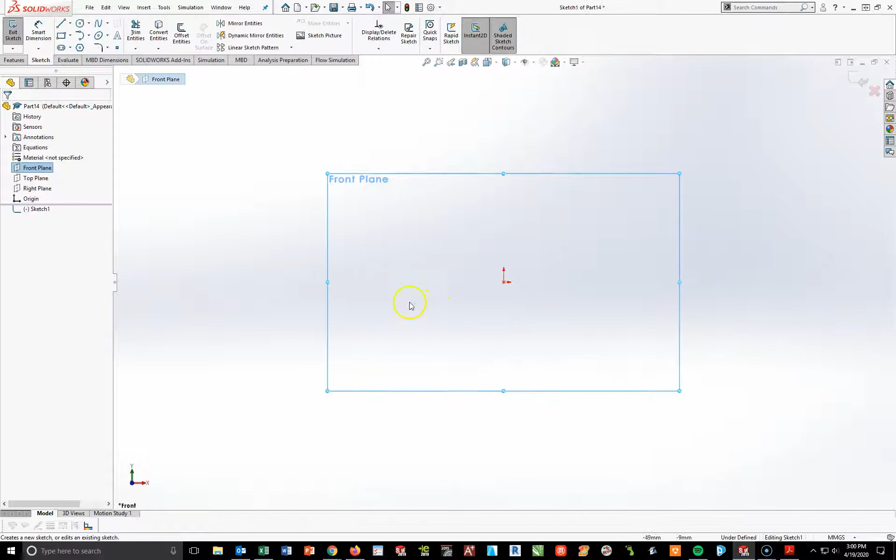Slide this over so I can see it on my other screen. Again, I'm going to do a file new, a metric part, and say OK. Then, starting on my front plane, I'm going to create a new sketch, and I'm just going to start with 2 sets of circles.

So I'm going to take the bigger circle to the left, and start it at the origin with a couple smaller circles off and up a little bit to the right. Turning on my Smart Dimension tool, I'm going to begin to dial these 2 in by clicking on each circle.

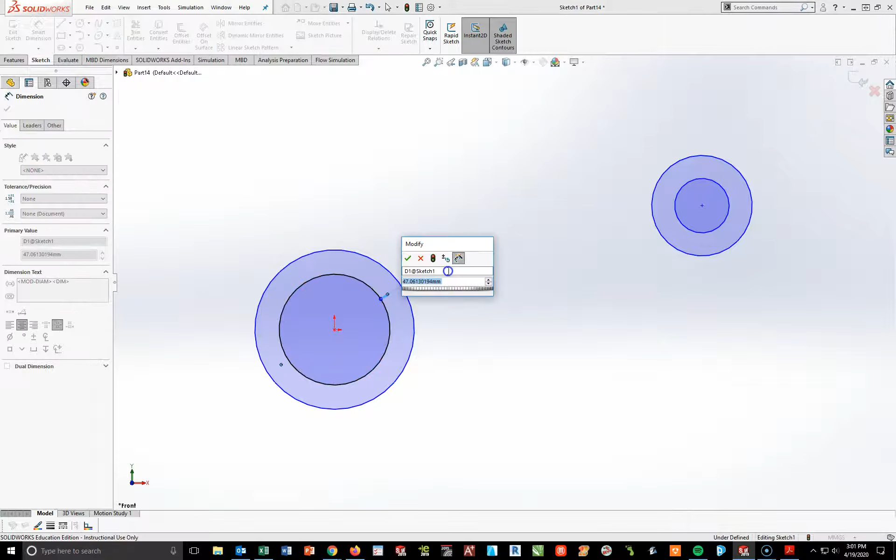Adding in the dimension that is on the drawing: 25 and 35 here. On the top circle, the inside one will be 20, the outside one will be 30. And then the key is, between the 2 of them, they're 100 millimeters apart horizontally.

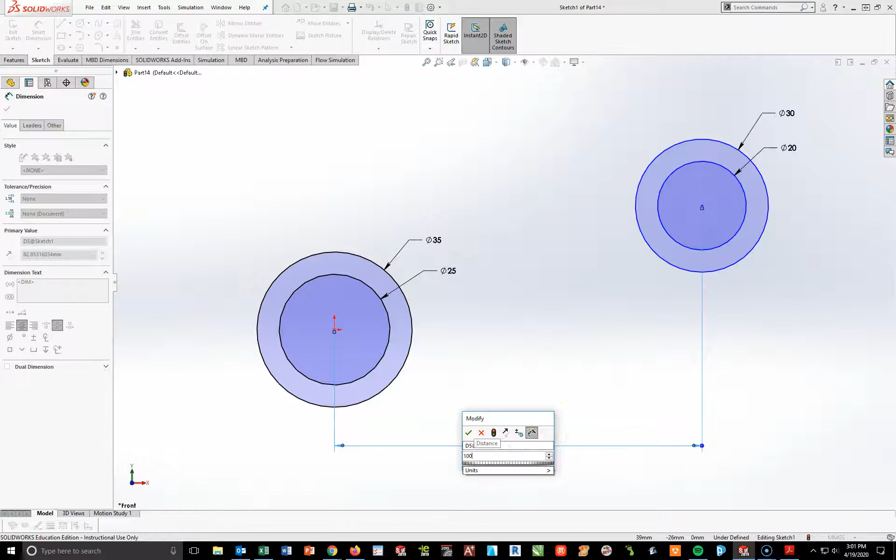And then from the center of the far right to the center of the one to the left and over to my right, they're going to be 15 millimeters in height between the 2. So there are my 2 fully defined sets of circles.

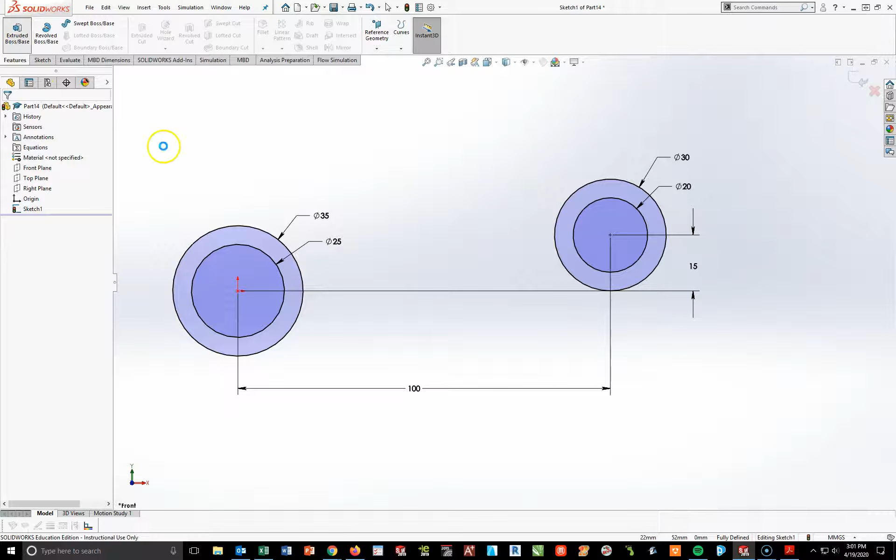So now what I'm going to do is go to Features, Extruded Boss Base, and again, I want to keep everything in the center of my part. So I'm going to go to Midplane, 12 millimeters, and hit my check mark.

Okay, now I don't want to leave them blue, so I'm going to go over to my material, right click, and the great part is the 1060 aluminum alloy is right here in the speed menu. Left click, and now I have my 1060 alloy material.

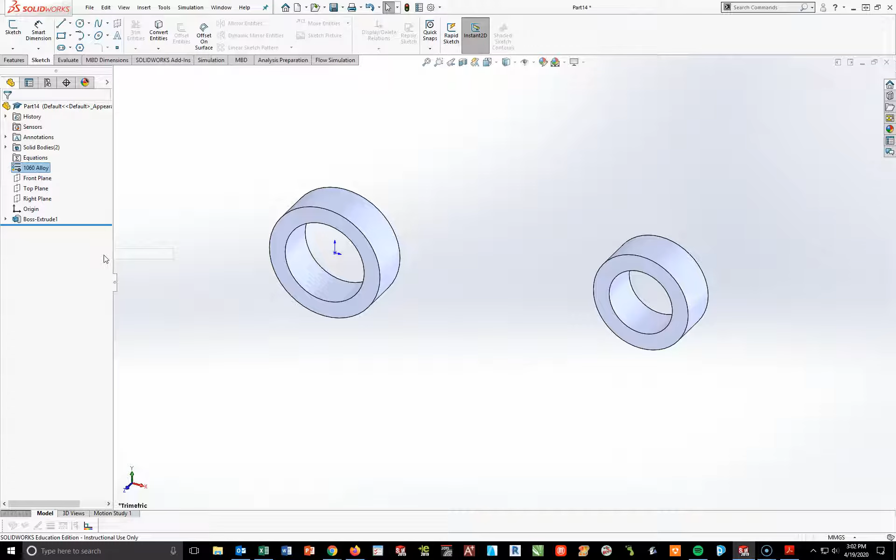So now what I want to do is create the second phase here. I'm going to go ahead and, again, starting on the front plane, create a new sketch and do a normal to.

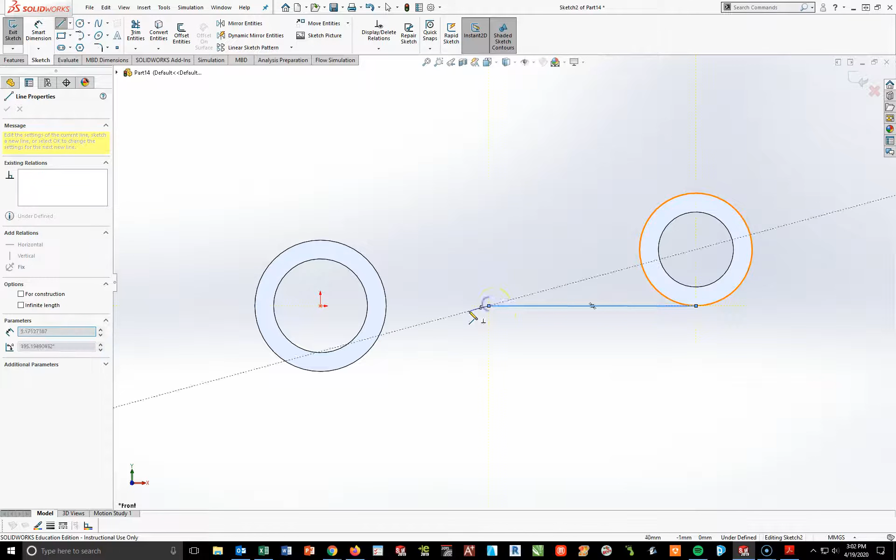Now in this case, I'm going to start with my line tool. I'm going to kind of start from this lower quadrant here and pull horizontally to my left, out a little bit, about 2/3 of the way. I'm going to left click, pull, create a shallow arc, and then drag a line.

Okay, now that line, I want to make sure it's tangent. I'm going to stop right here for a second. I want to make sure that this line and this curve right here are tangent, and that this line here and this circle are tangent. Okay, so that makes a big difference there.

All right, I'm going to go ahead and dimension this circle right here to a radius of 20. And I'll go ahead and pull this kind of back a little bit, shorten that up, and bring this in a little bit tighter. That's fine. We'll get this defined here in just a moment.

Matter of fact, we have to add an angle here, I apologize, between this line here and this line. Delete that, sorry. We're going to add a dimension between this line here and this line here of 30 degrees.

Okay, now I'm going to trim this in a moment. I'll show you how after I do a couple other things. So there's the bottom lines right there.

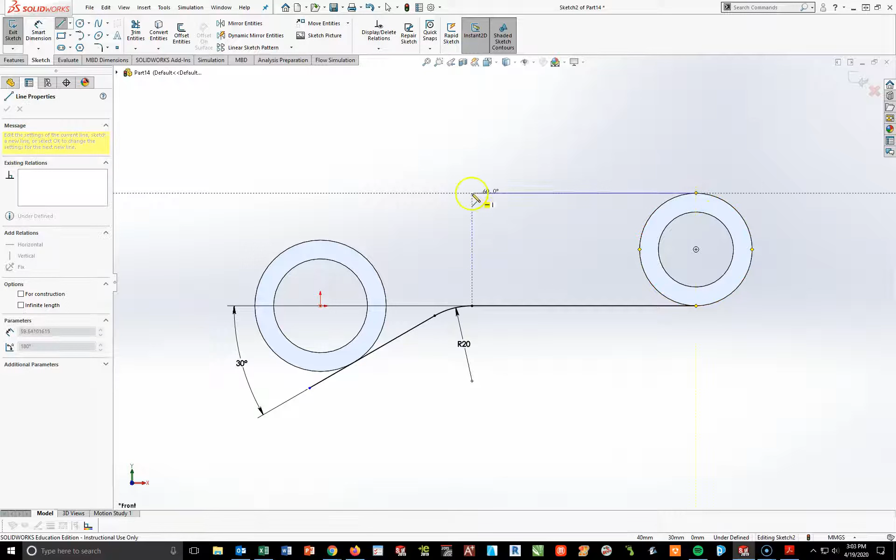I'm now going to go and do the same thing on the top. I'm going to come over here, starting at this quadrant, pulling straight out. As soon as I get close to the circle, I'm going to left click, pull, and create an arc. And the arc is going to line up at the center, so I'm going to go here, but I'm going to pull a short, straight line. This line is really important. Don't just put your arc right to it, or this is not going to define correctly and your mass will be off. Okay, so make sure you have that short line.

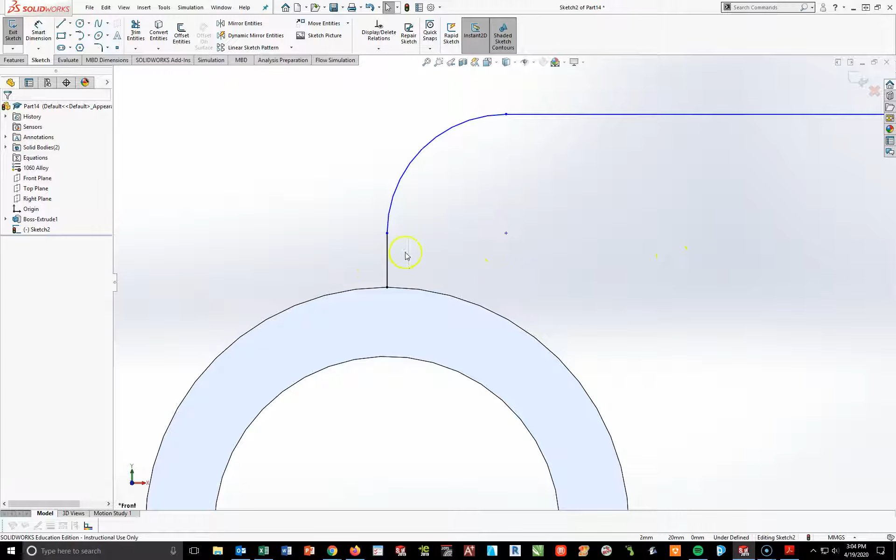I'm going to make sure that this line is vertical to that point, just to make sure I'm on it. I want to make sure that this point right here and this point right here are vertical. That defines these two lines right there. I'm going to add a radius of 10 millimeters on this curve right here.

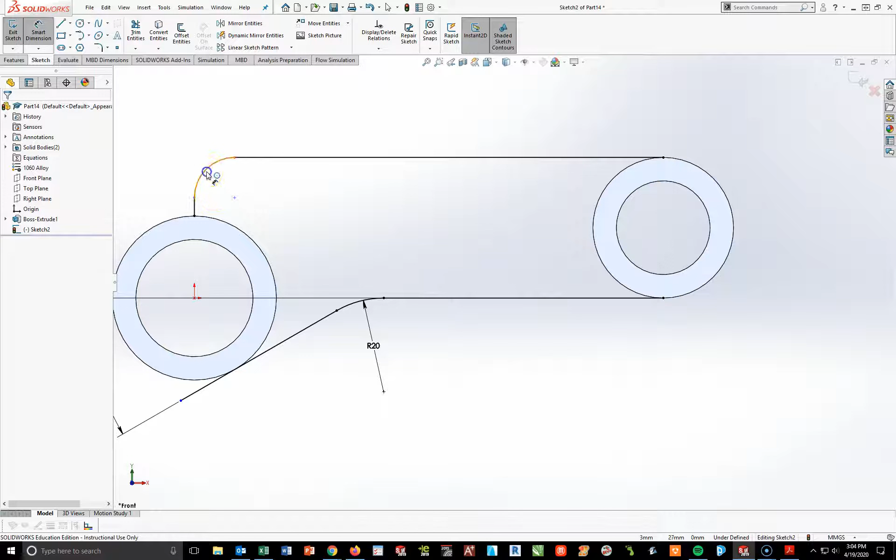Okay, now this is not ready to be taken care of yet. We're not a closed figure. All I've got are two sets of lines. What I want to do next is I need to take this edge right here and left click on it and hit the word convert entities. I'm going to hit this edge of the big circle here and also do a convert entities.

All right, now if I use my trim tool and trim off the back of that circle and this line, trim off the back of this circle, you will now see it turn purple, meaning that this is a closed figure. That's exactly what we want.

Okay. Now you could do your midplane extrusion here and then cut the two pockets out. What I'm going to do is actually in this case, I'm going to go and draw these two pockets right here by doing a 5 millimeter offset of all these lines. And then I'm going to draw two lines here, trim this out in between 10 millimeters, and then dimension to this inside at 50 from the center.

Okay, once I have that, I can then do a midplane extrusion, and that will leave these two pockets empty. It saves me one step. You could do a cut extrude if you chose to. In my case, I'm trying to keep my design tree short, so I'm going to try to do this as one thing.

So I'm going to turn on my offset entities and go 5 millimeters. Click on this line and reverse my direction. I'm just going to work my way around the part, including that line, this circle, this line, 20 millimeter arc, this line, and finish off with that circle. So there is one large pocket cut.

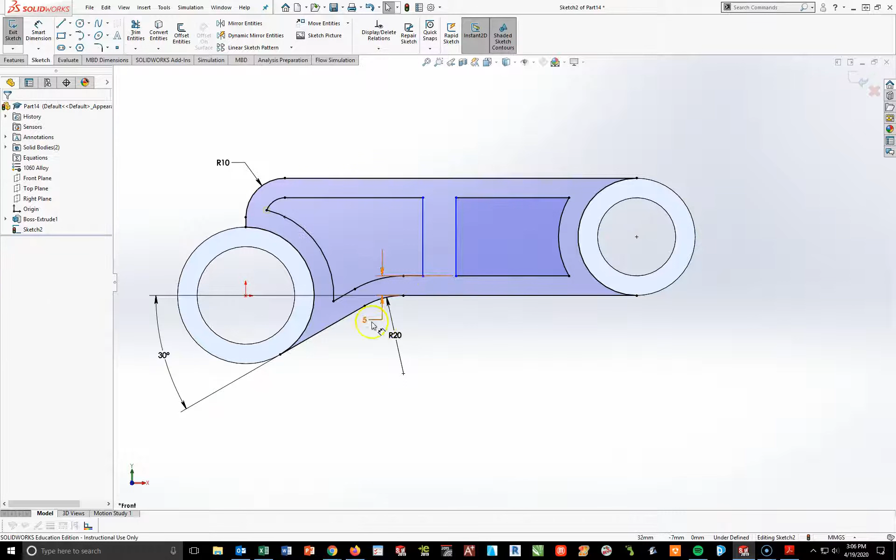I am then going to go up here to my line tool and I'm going to draw two lines. I don't want to get caught at that midpoint. I got to be careful there. I'm going to draw a second line. I'm going to turn on my trim entities and get rid of the line in between. And then what I'm going to do is add my 10 millimeters here to make sure I have 10 millimeters between.

It's still not defined because I still need to add a 50 millimeter distance between that line there and the center of the right circle. Okay, now as you can see, I got a slight issue right here.

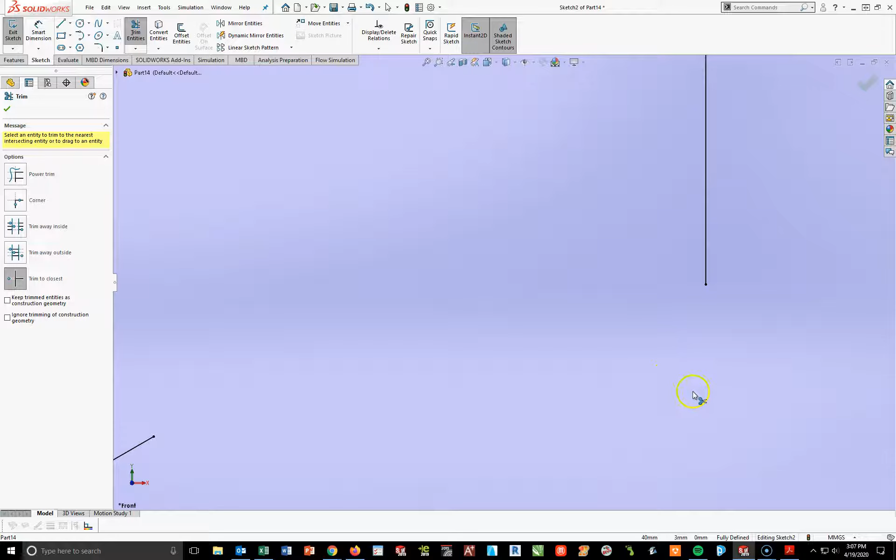All right, so I may have to come in and do a little bit of a trim, and see if I can pull this back. I may not be able to. Let's see if I can pull that down. If I can try to trim it again. If it doesn't work when you trim it, you may have to add this arc back in.

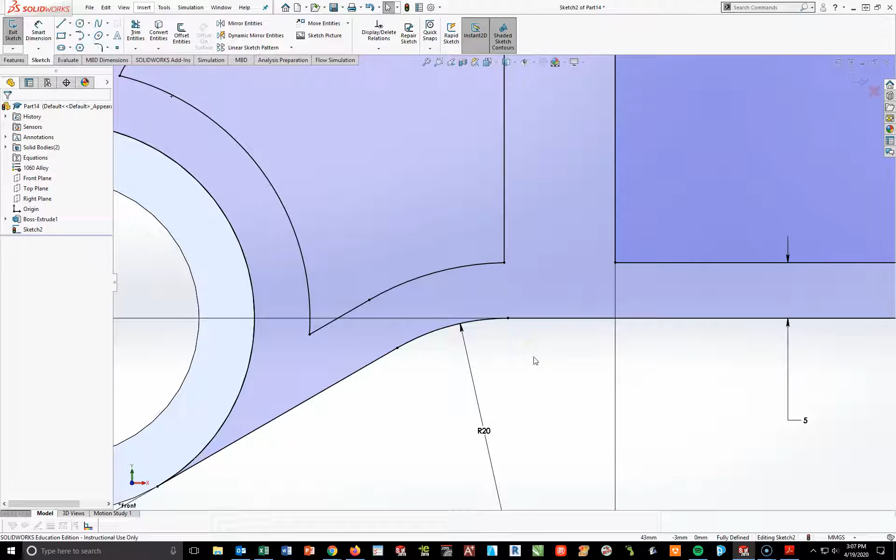Okay, so what I'll do in this case is I will add in a 5 millimeter offset right here. Okay, that looks good. Okay, and then I'm just going to pull this to right there, and that should define it. Sometimes you have to manipulate to get it to work out. Okay, sometimes you can just trim it. Sometimes it doesn't see the intersection. It won't let the trim, so you just got to offset that arc to create what you got right there.

All right, so this is where I'm left off. These are all the same dimensions that I have on the drawing in the same spots.

So again, it makes it really easy to make sure I'm checking I got all my dimensions where I need them by just looking over at the drawing and seeing these in the same spots. Now from here, I'm just going to extrude this outside section, leaving these two inside boxes empty.

So I'm going to go to Features. Actually, I'm going to hit space bar and isometric so you can see this. I'm going to go to Extrude. I'm going to do a midplane at 10 millimeters. And then all I'm going to do is just click inside.

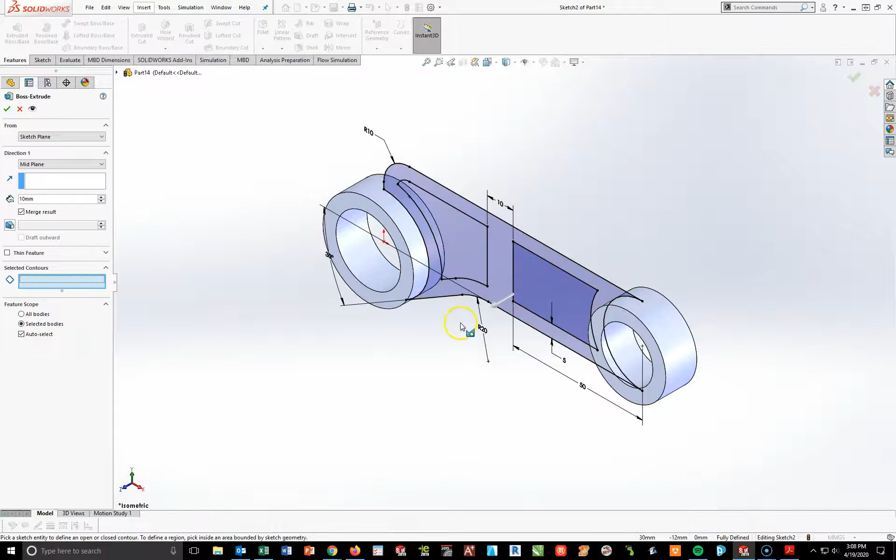In this case, I may have a problem. See, this one is not letting me pick it. That tells me I have an open hole somewhere. So what I need to do is go back and look and see where I potentially have a hole. I'm going to have to look at each corner to determine what is off.

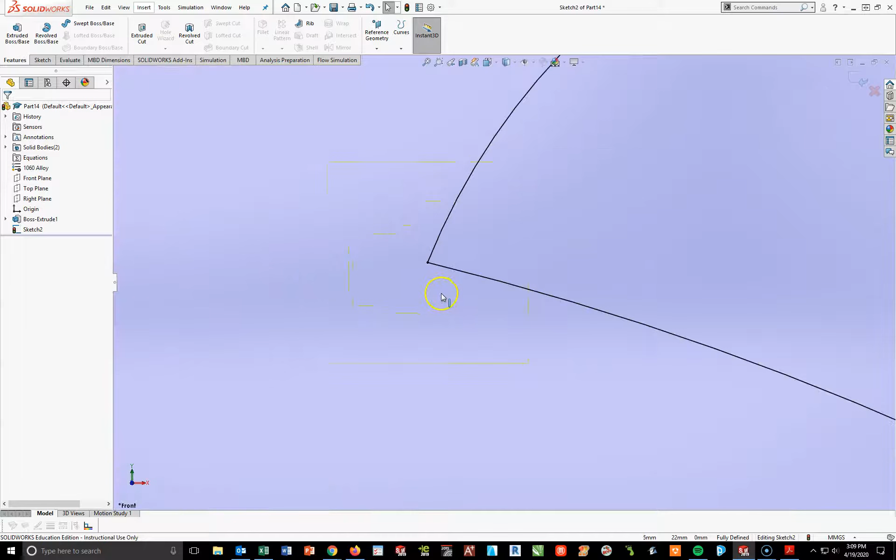I think it's this one right here. I think there's a problem right there. I'm not sure if this line and this line are attached to each other. Not positive what's going on there.

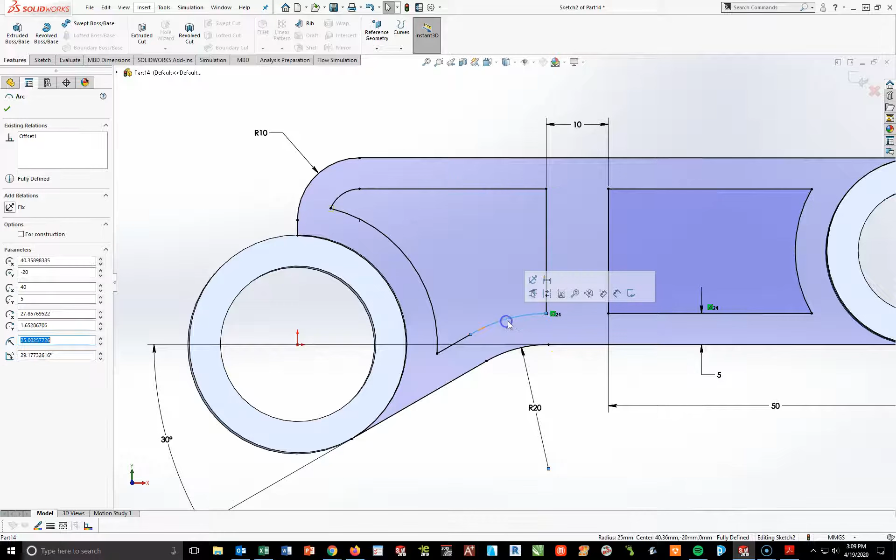Just trying to make sure I have everything put together. Make sure those are together. I'm going to make sure that this and this are okay. So at this point, if this doesn't quite work...

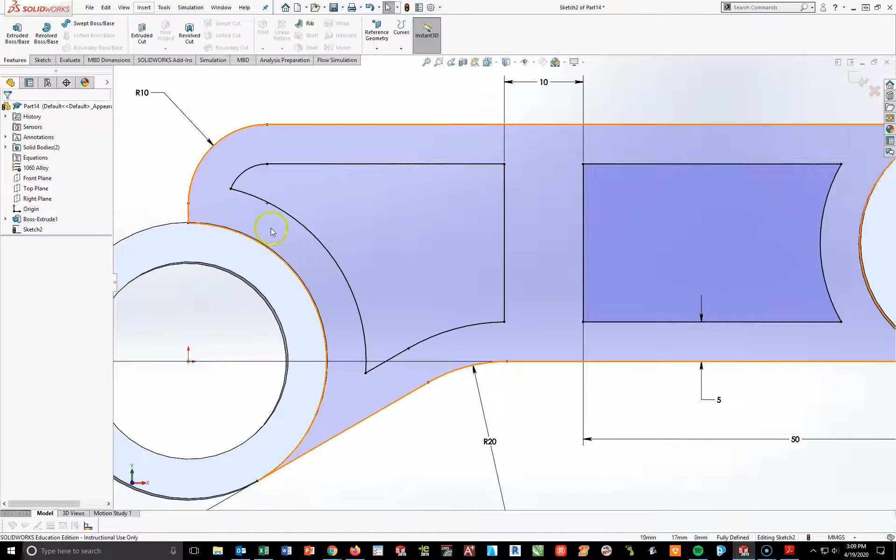Again, I'm not sure why I'm not seeing a hole anywhere. I'm not quite sure why there is an issue. I'm not sure if there's something there or if something's wrong up here. In this case, I may have to just go ahead and do the one extrusion and then come back and add these two back on, because for some reason it's not liking this region right here, and I'm not positive why.

Okay, so I'm looking at this. I'll do a mid plane, and I'm just going to do 10 millimeters.

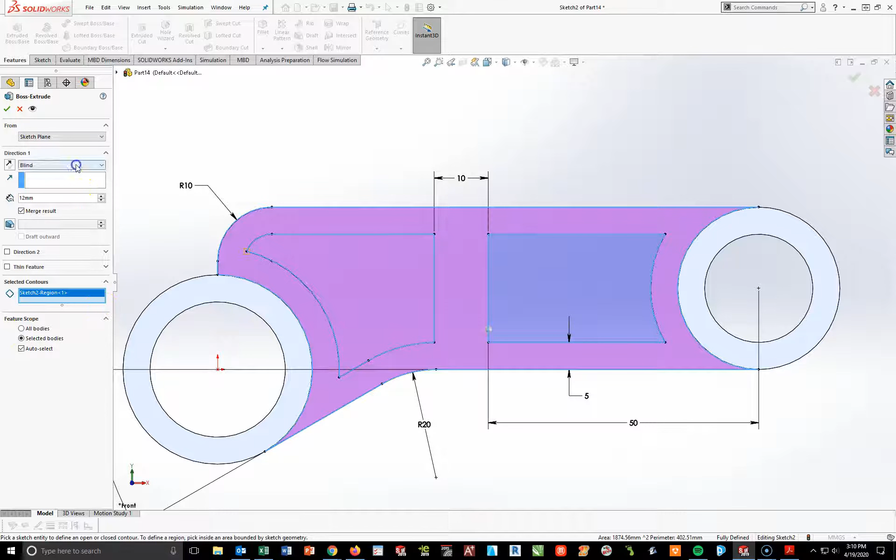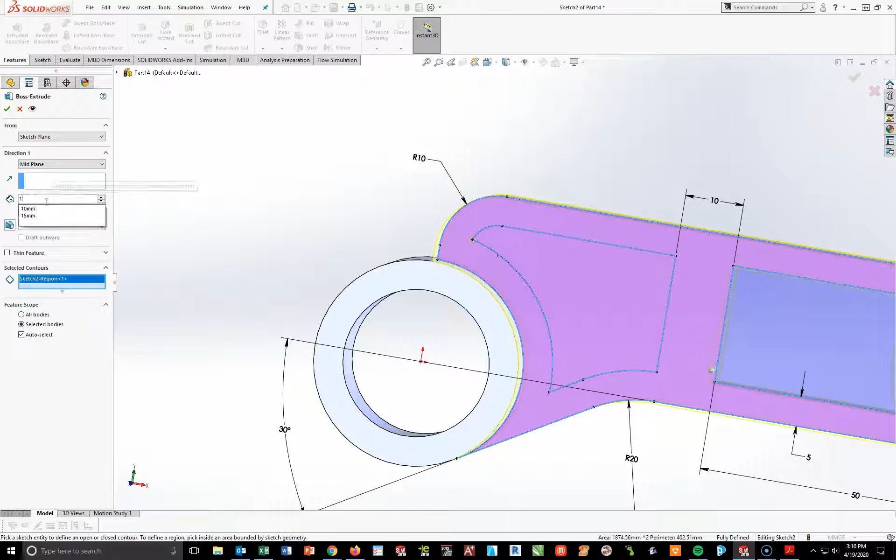What I'll probably end up doing is coming back in, and I may have to rebuild this sketch. I'm not sure exactly what is wrong with it. I see a box here that tells me something's not right, but I'm not positive what is wrong with it. Okay, so I'm going to go in here and just do a mid plane of 10 millimeters.

And I may have to add a quick step. I'm going to see if I can go in here and real fast go to that front plane. I'm going to have to create another sketch and see if I can get it to work. Again, sometimes this happens where things aren't always going to work the way you want them to.

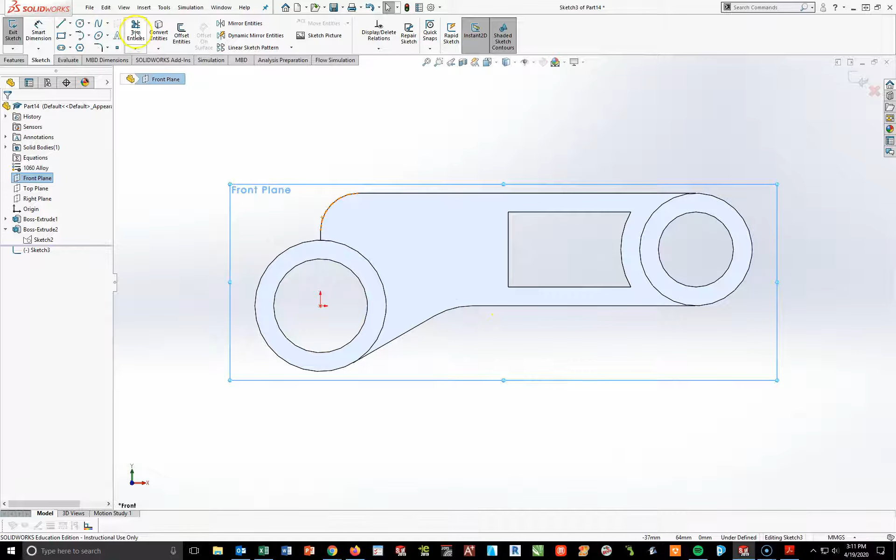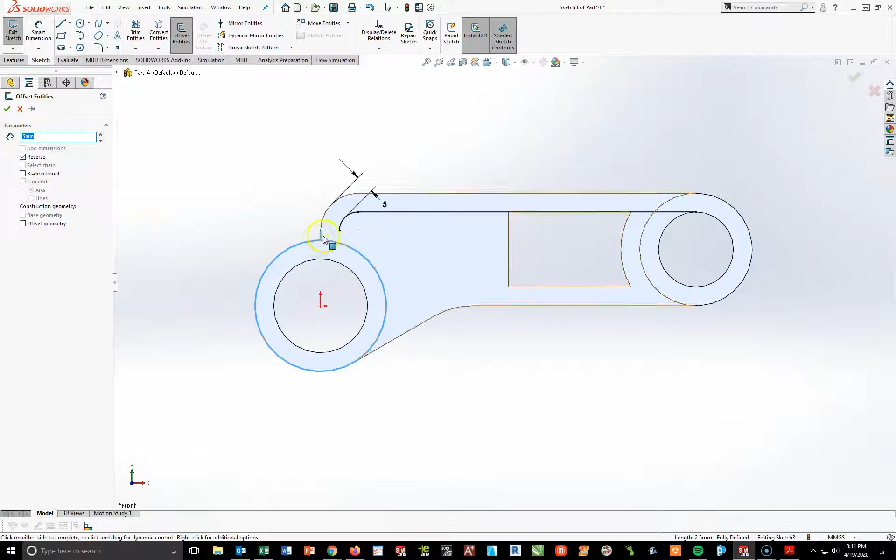So what I'm going to do is offset entities and flip this to the inside and reverse. Reverse, oops, offset, reverse, hit this edge here. Oh wait, what am I doing? Hold on, okay, check. Offset. Check, I'm going to offset. Oops, not trim, offset.

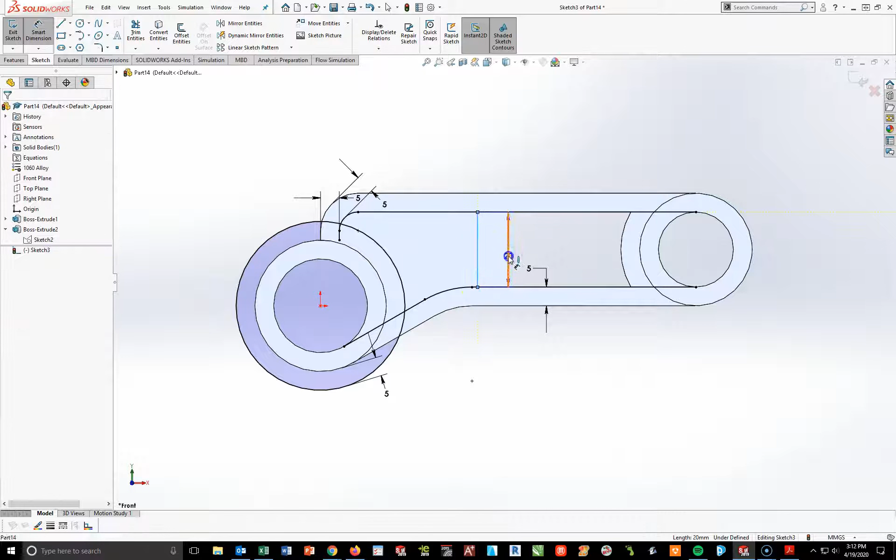Okay, and check. Basically, I'm going to go ahead and draw that other line in here. Make that distance between these two at 10. And it looks like I'm going to have to do a bunch of trimming.

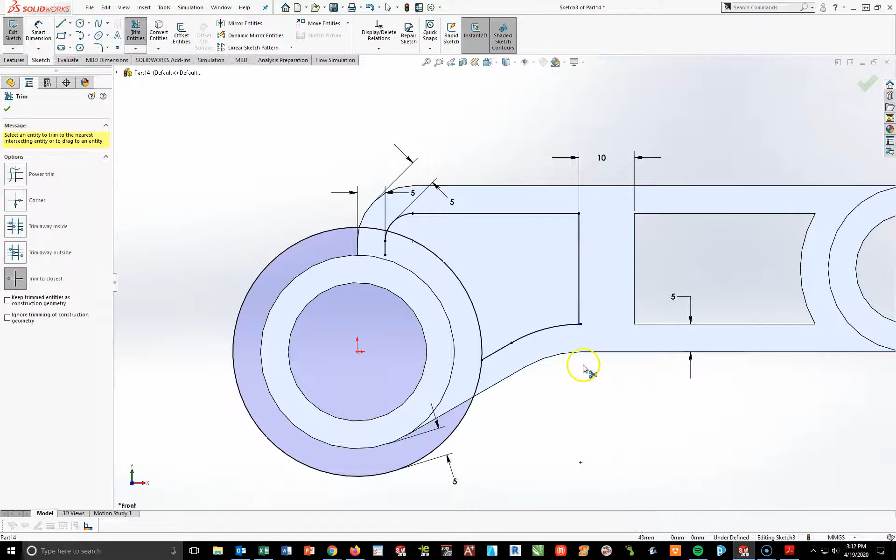And again, it looks like my issue may be right here. I'm not positive why that would happen. I'm going to take and trim that off. I'm going to trim this piece off with this. I see a little bit of an issue right there.

Control Z. I'm just going to pull this one long and then trim that off. Okay, that looks good there. There, I should have a line there. I'll trim off this part and finish off by trimming here and here.

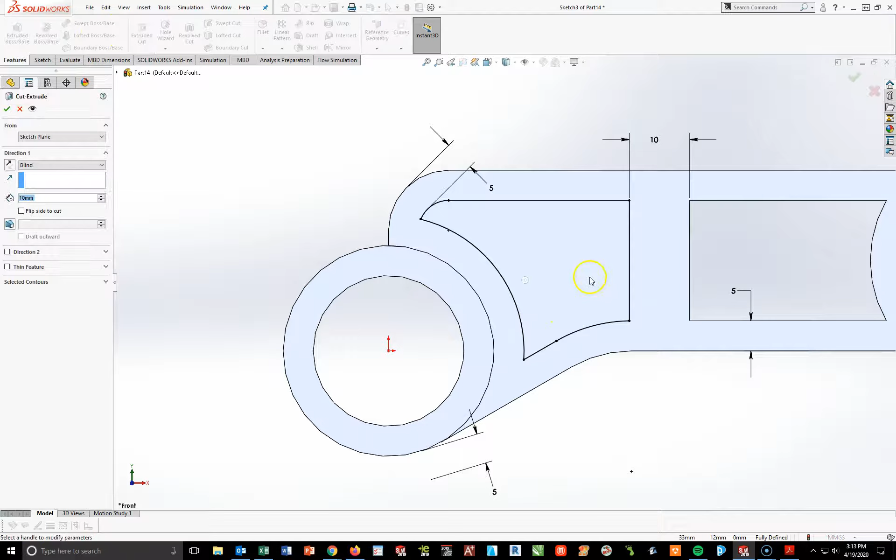Now my hope is if I come in here and do a Features Extruded Cut and do a through all both, it looks like it worked. Now again, I don't know why the other sketch didn't work and why it worked there. Sometimes you got to play that game. It kind of stinks though because I had to add one more branch.

So in essence, I probably could have done that cut as a separate entity. However it works, if it works the way it worked with the sketches first, it saves you a step, awesome. If not, go ahead and extrude it, do your offsets and cut the two pockets. Whatever way works best for you, that's what I want you to do.

Okay, next I am going to focus on the back part of this. So again, looking at the model, here's phase 3. All right, again, I'm going to start on the front plane.

I'm basically going to start by drawing a circle that's going to be 35 millimeters up from the center of this one and 15 millimeters out. And then I'm just going to draw a line straight up till it connects. I'm going to draw a second line off of here at 135 degrees, and where it is horizontal, from this origin or from the center of that circle.

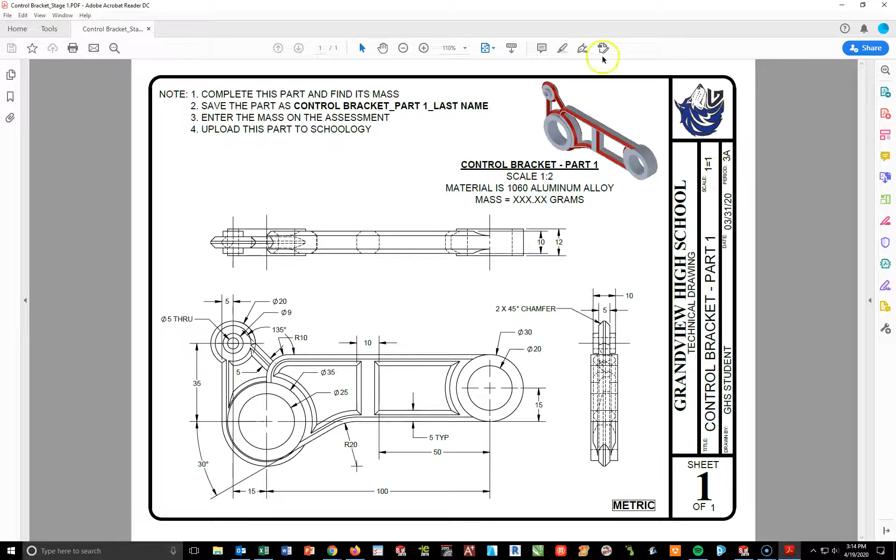So now, going into this, I'm simply going to go to my front plane. I'm going to start a new sketch. I'm going to do a space bar and a normal to.

Start with a circle out here in space. I'm going to dimension that circle to a diameter of 20.

All right, I'm going to go here, and from here to here will be 35 high. And from here to here, I'm going to pull straight down, will be 15 out. All right, dimensions are exactly in the same spot as you see on the drawing.

All right, now from here, I'm just going to turn on a line tool. That's going to start right here at the edge or quadrant of the circle and go straight up to the edge of the circle. Hit escape. Okay, I'm going to make sure this is vertical. It is.

All right, and now I'm going to go here to draw a line off of here somewhere, kind of off. Actually, in this case, I'll draw it off of maybe that edge there to there. Actually, then when I get to that midpoint, I apologize, that's not where I want it. I just want it somewhere on this edge like so.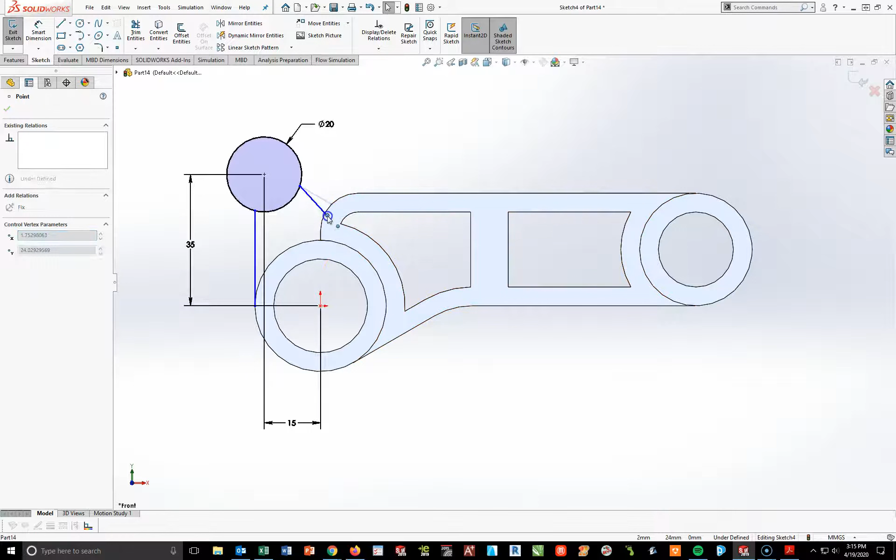Now, the key is I want this endpoint of this line to be horizontal to that center. I want the angle between this line and this line here to be 135 degrees. Okay, so that is fully defined.

All right, now in this case here, what I'm going to do is I'm going to measure, there's a dimension on there from this center to this line. This is going to be,

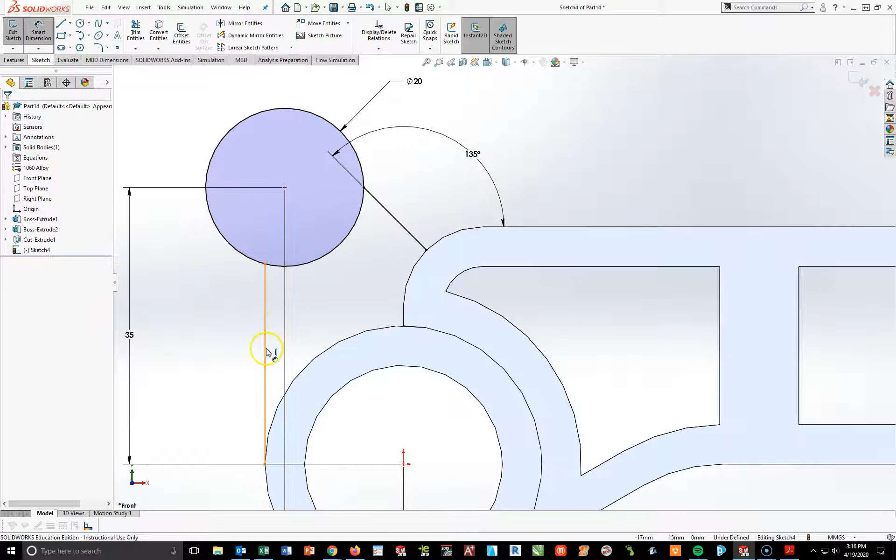Oops, you know what I did wrong? I know what I did wrong, sorry. I made one mistake there. I looked at my drawing incorrectly. This line is not there. I apologize. There is an offset of this circle I've got to deal with.

This line here I'm going to draw, actually it's from here straight down. Okay, and I'm just going to draw it vertically like so, but this line is actually, I apologize, from here to here. I should have saw that earlier. This should be 5 millimeters.

Okay, and then it looks like I've got a circle that is going to be offset. In this case, that is 5 from the center. I'm just basically going to, in this case, create a looks like a 2.5 millimeter. Let me see, hold on here, I got to think about this. So this is 5 millimeters from here over.

This is going to, I'm going to offset this. First of all, I'm going to offset this 5 millimeters. That looks right. Offset this 5 millimeters. The other, oops, nope, I can't do both. Sorry, because it's going to go the other way. I'm going to offset this 5 millimeters. Reverse. Okay, check.

And then this, I'm going to create basically an offset of this circle. That is going to be, and I did not get my dimension on here. I got to add it on, that dimension there. Real quickly, I'm just going to open up and just double check what that one should be.

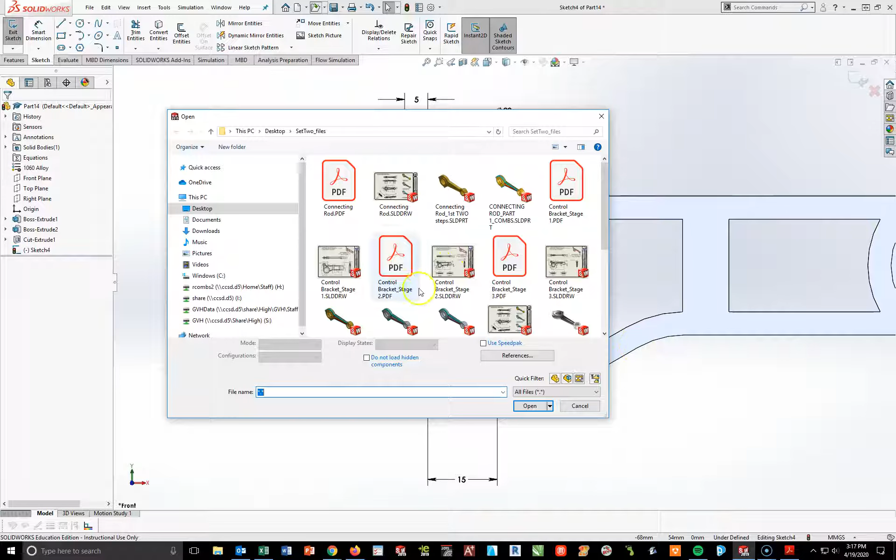So if I look right here, I got to add one more dimension. Okay, so coming back into here and opening it, I am missing this dimension right here of this circle. I need to add that in. So let's do that right now. And that is going to be a radius of 20 or a diameter of 40.

Okay, and I'm actually going to right click and say display options and display diameter. You do not have to do this since you do not have to do the drawings. Okay, so I'm going to make that 40.

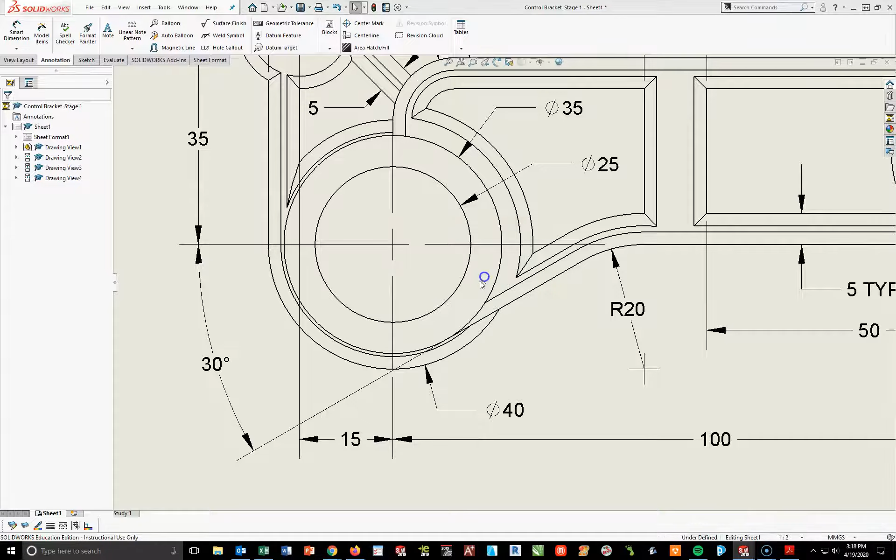So what I need to do is go back to my part right here, and I'm going to create a circle from the center that has a diameter of 40.

Okay, now in this case, I don't like when that happens. Oops, sorry. I like mine to be at there, and I'm going to call it 40. Okay, so now this is what I'm looking at.

All right, this one here, I'm just going to have it intersect right along there. And then now I could go here and make this one intersect here, add that 5 millimeter distance between them. I apologize, that should stay on there. That's 5. Okay, this is 5.

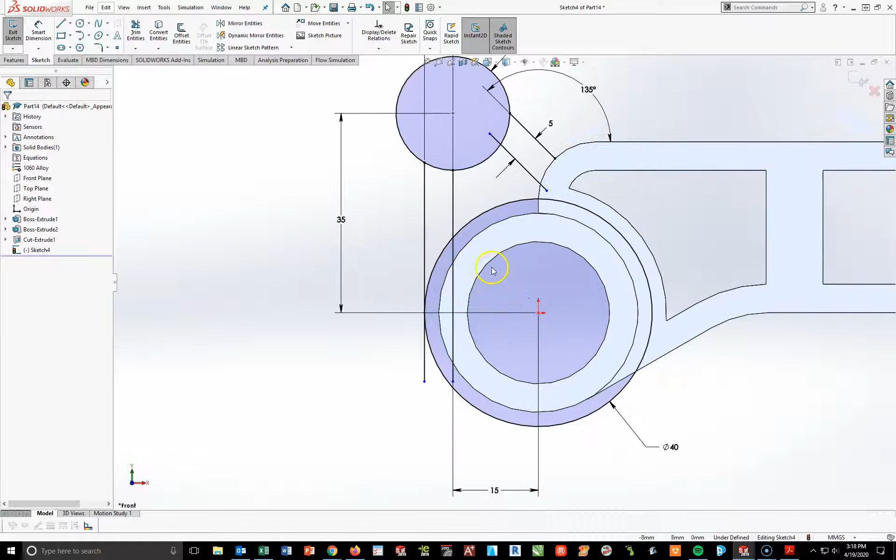And now what I can do is simply do some trimming. Okay, so at this point, I'm going to kind of trim my tools.

The reason this is not filled in is because I also need to do a convert entities on this edge right here, and check. Now what I can do is simply trim everything I don't need off.

So I'm going to go trim here. I'm going to trim that edge off right there. Trim this edge off right there. I'm going to trim this off here. Let's see, I'm going to trim off...

I'm going to do one more conversion here. I've got to do another convert entity on this line. And then I'm going to go ahead and check, which will allow me now to come in here and trim that piece and this piece.

Okay, it doesn't like this because I'm going to get rid of, in this case, I've got to keep that concentric, and then I'm going to trim this piece off here, and then that will stay.

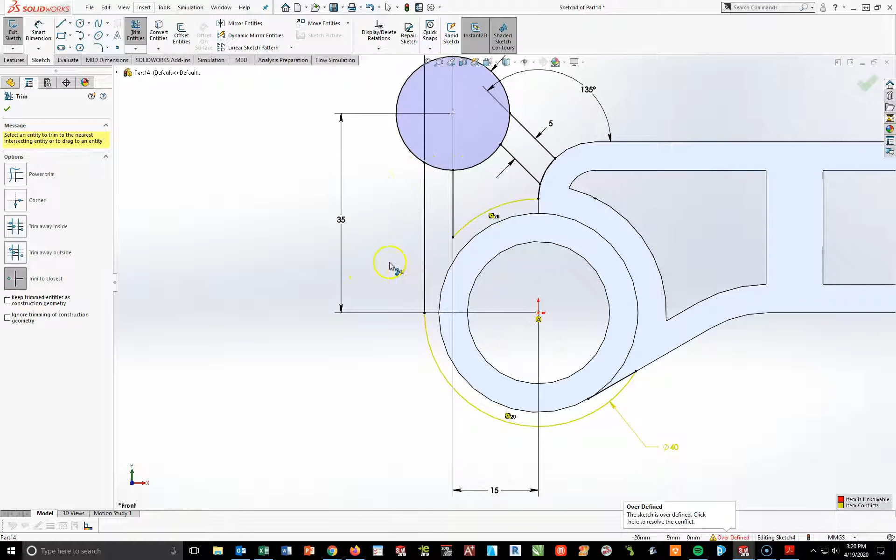That should be everything I need to do, except for, let me get rid of that and that. Okay, now you can see there's a whole lot of errors going on here, and I'm not quite sure why.

What I'll do is maybe get rid of this concentric. Wait, this concentric here is a problem. It's concentric to something, and it should not be. So get rid of that. I will get rid of this.

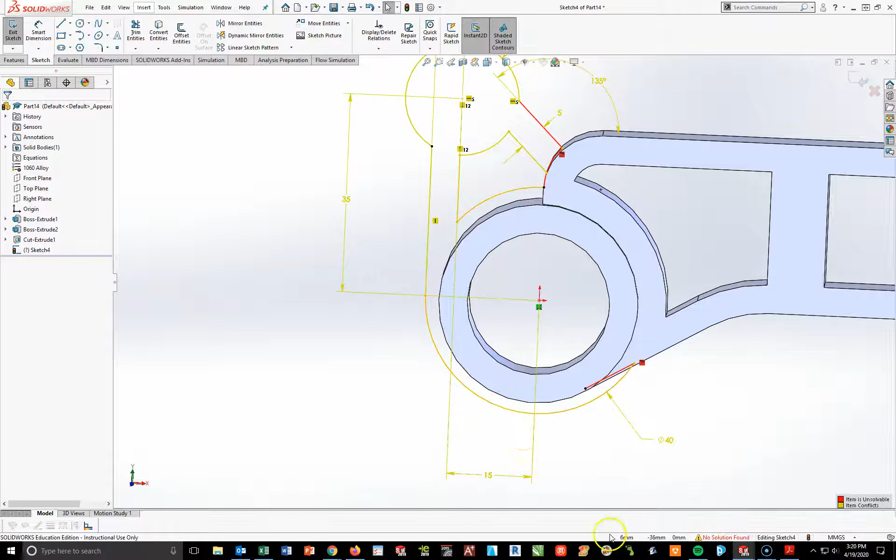And let me see what else I've got to figure out here. I'm not sure what is, whoops, wait, hold on here.

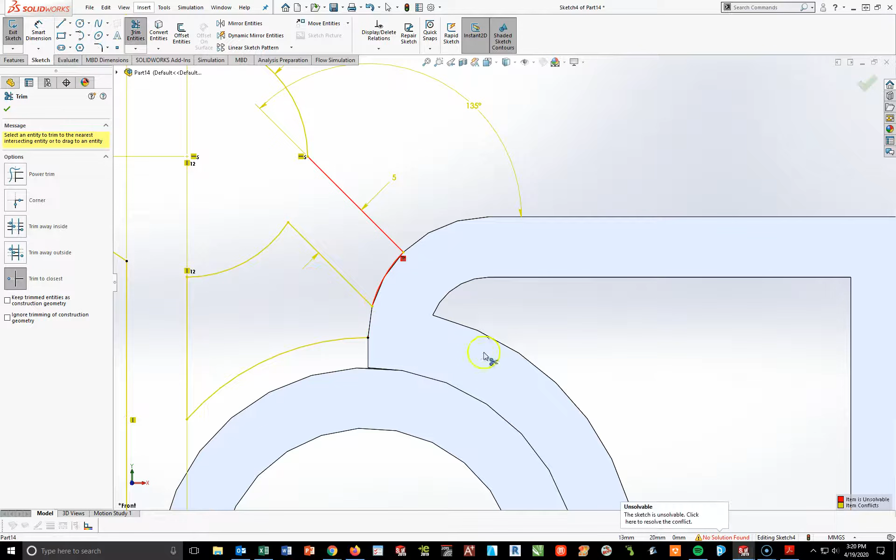Does not like that convert entity. I'm not sure why.

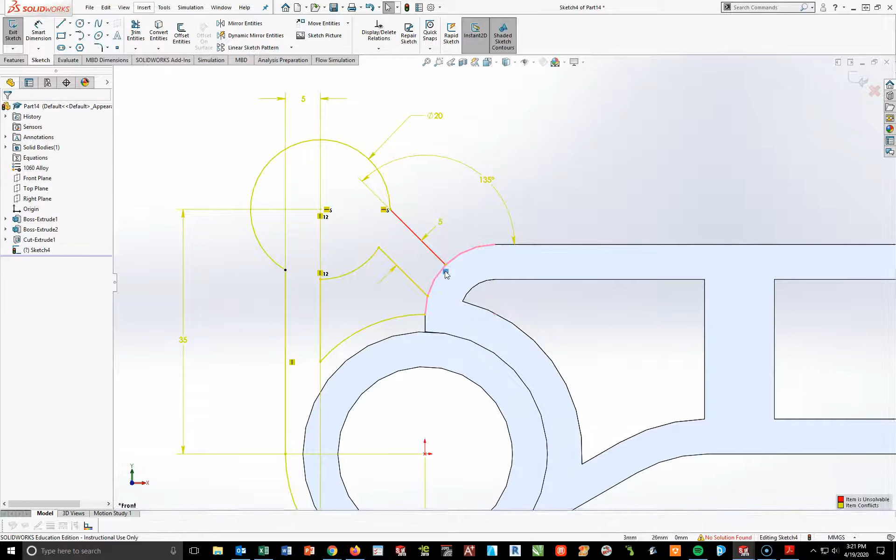Trying to get rid of that, but it will not let me. I'm not sure what's going on with why it will not let me get rid of that. Okay, same with this one here.

Okay, but my error looks like it's right here, and I'm not sure why. Unfortunately,

I cannot get this. Let me see if I can get this 5 to go away, if that helps. No. I'm just going to start deleting some of my dimensions. That seems to help.

Not sure what's going on here. Okay, so that at least gets something going on there. I'm going to take, oh, I know part of the problem is I need to do a convert entity here.

Sorry, I'm confusing you. And then this is all going to be a convert entity. That's got to be a convert entity.

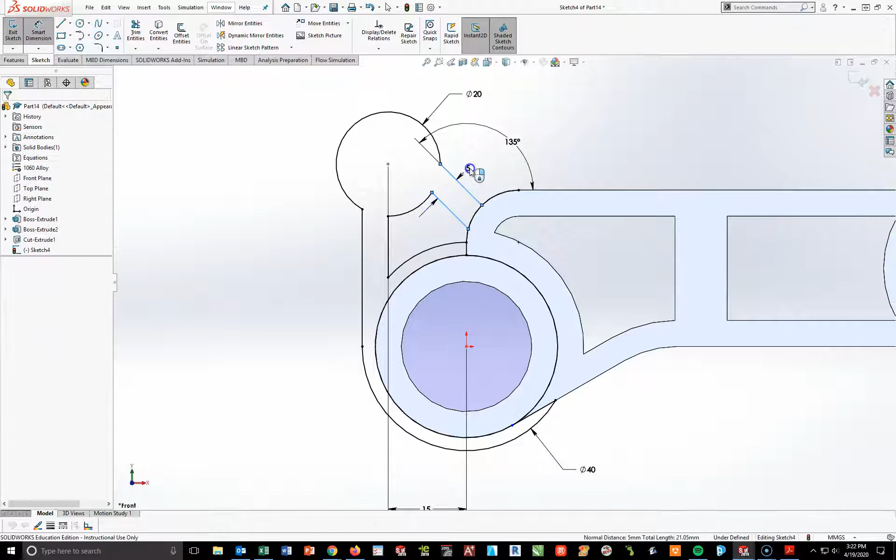I'll make this collinear. 40, I'll add the 5 back onto here. And that seems to make a solution there.

Let me do a quick trim. I'm going to trim off this piece right here.

And then let me see what we got here. Do I have everything I need? Just double checking everything, just looking one more time. It looks like it's fully defined.

Again, I don't know why I dropped those numbers off and what's defining this. That's kind of confusing. But what I want to do right now is go to Features, Extrude Boss Base.

Okay, I'm going to pick this section right here. Okay, that looks pretty good.

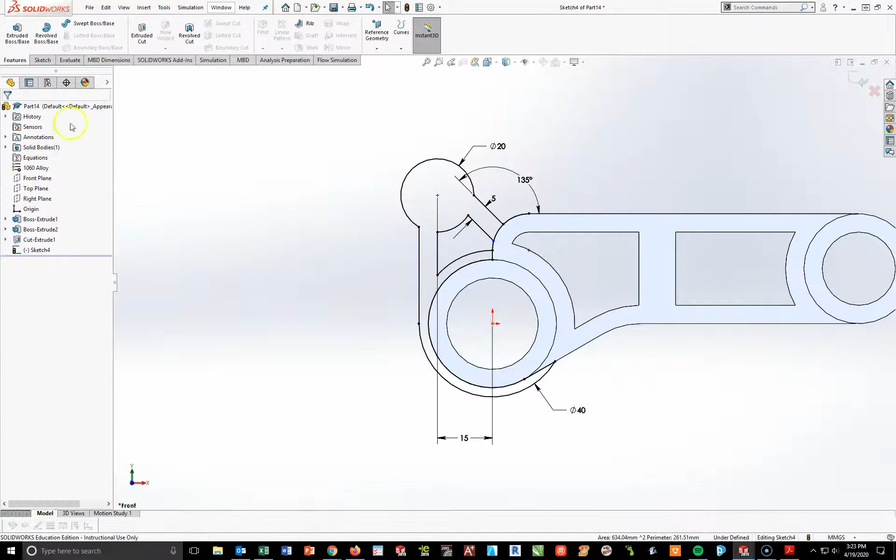Honestly, I think the reason it's not showing up and I had to pick it was I'm not done with all the trimming. I should have trimmed off that little piece right there. This one here, it looks like

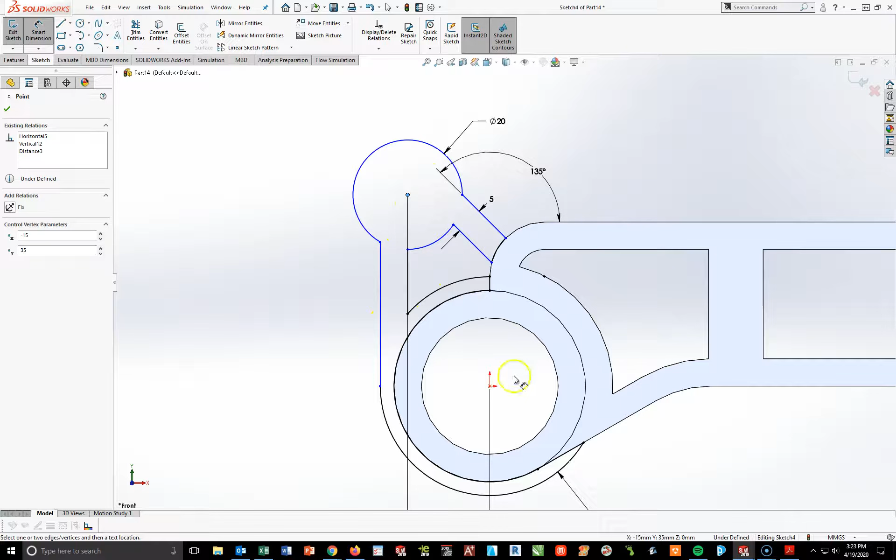this lost, that's there. Okay, now I need my numbers. Sorry about this, guys. I don't mean to make it so confusing. I do apologize that I am all over the place on this.

Okay, bear with me. Hopefully you're getting it to work the first time and don't have to go through this big scramble like I just did.

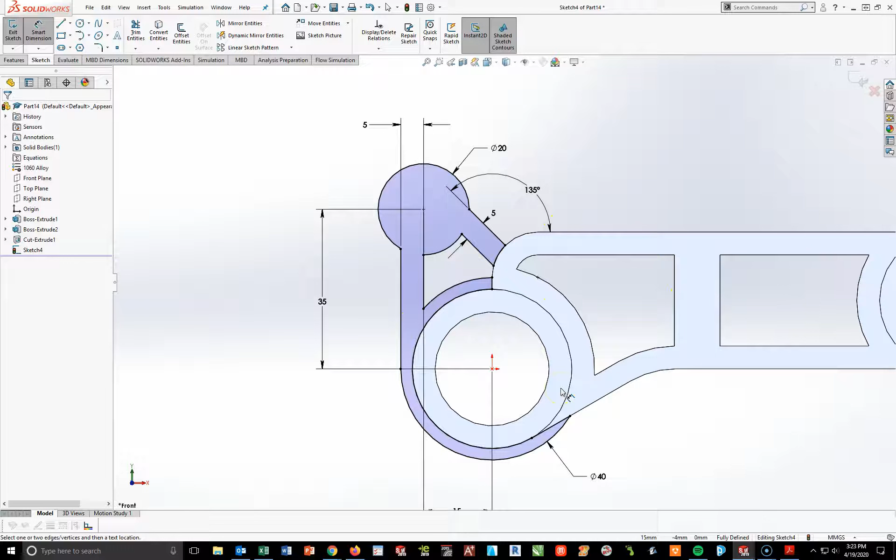You could draw that in by hand if you had to, but this is kind of the way it should look. Now I see it close. I can go to Features, Extruded Boss Base.

Again, I'm going to do a 5mm extrusion on this with a midplane extrusion. Okay, and again, if you look on there, you can see that pretty clearly. That's a midplane extrusion. That gives me the third part.

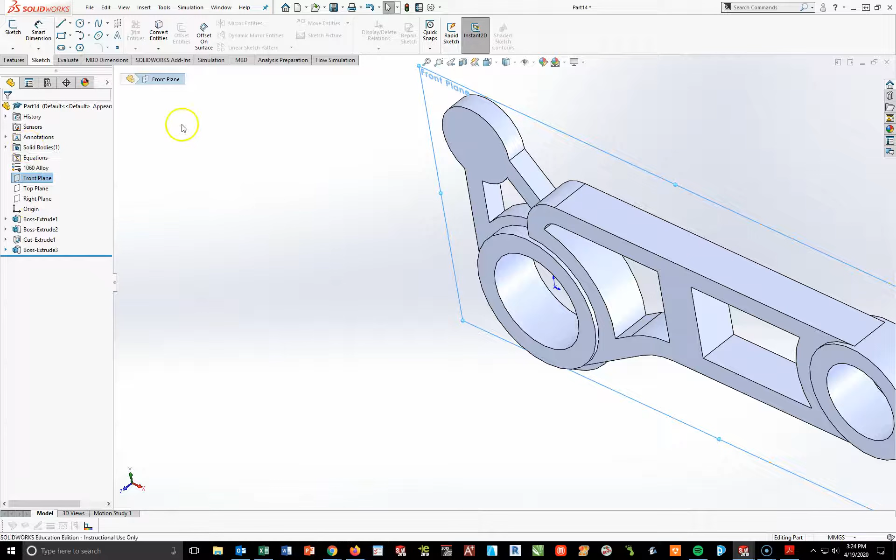Okay, again I've got one more sketch to do here. I'm going to go to my front plane. I'm going to do one more extruded cut here, or extrude sketch on the front plane with a Normal To.

I need to add a secondary circle here. That's going to be a midplane extrusion of 10 millimeters. Hover on the edge, attach to the middle, and make that 9 millimeters in size.

I'm going to extrude that out a total of 10 millimeters. So this is going to be, again, a midplane extrusion. So features, extrude, midplane, 10, check.

Okay, now I'm going to go on the front plane one more time. New sketch, spacebar Normal To, and now we're going to punch a hole through this. Then we're going to finish with our chamfers.

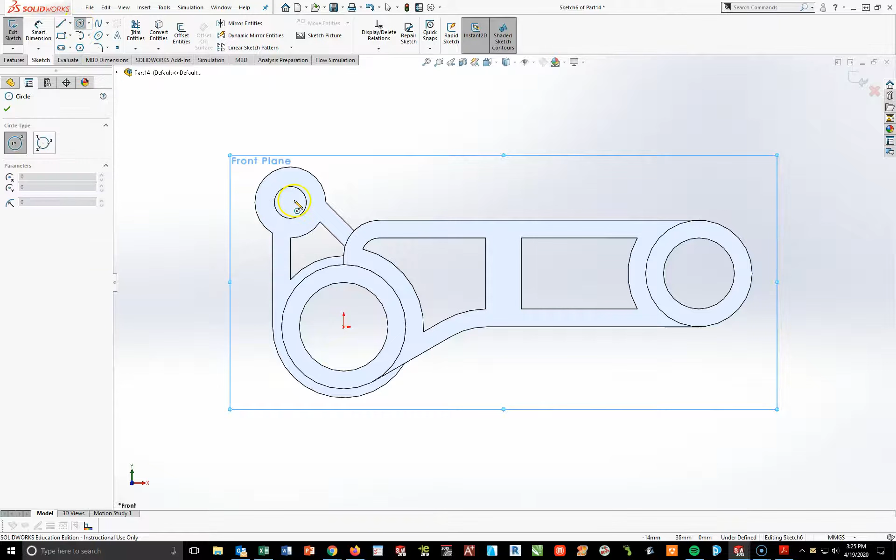That hole right there that's going to go through is a diameter of 5 millimeters. I'm now going to do a through-all cut both ways, and check. So here is your general shape.

Right now, the last step I have here before finding my mass is to go and add a feature chamfer. So I'm going to go up here, and the chamfer is going to be the same, 2 by 45 degrees. So 2 millimeters by 45 degrees. Oops, not 5, excuse me. 2 millimeters by 45.

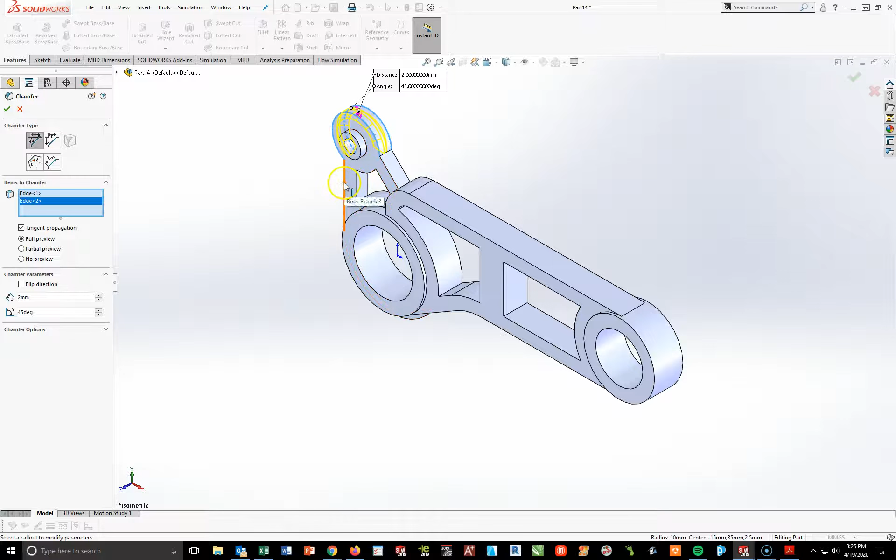All right, I'm going to hit the outside edge here, outside edge over here. Basically, I'm just going to work my way around the entire model here. Okay, so now what I'm going to do is on this one, I'm going to hit the outside edge. Whoops, is it the outside? Oh wait, is that right? Yep, there and there.

I'm going to hit the outside edge here, the outside edge over here. Okay, so that takes care of this. I'm going to take the outside edge up here, the outside edge up here, like so. Okay, I'm going to take this edge right here.

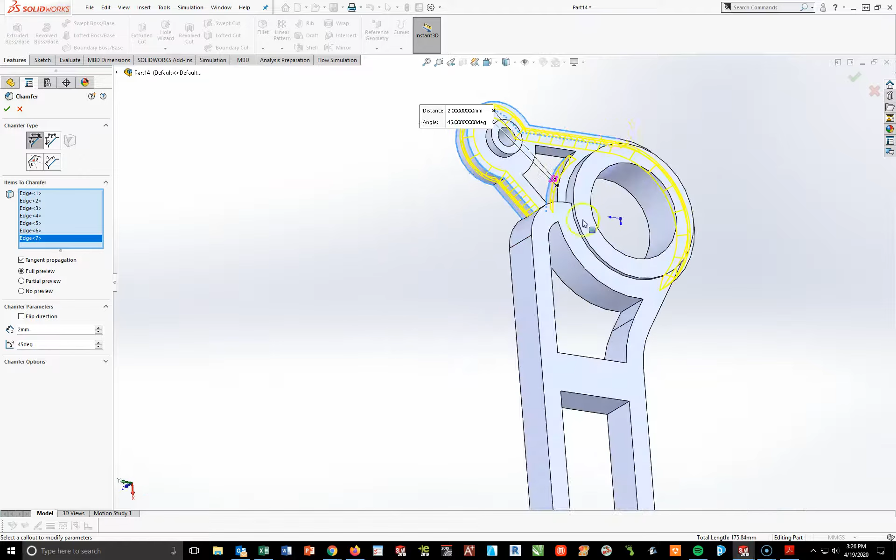Looks like this edge in here. And again, I'm kind of just looking at the model. It's going to be also these edges on the inside. So everything looks like it's being chamfered. So every edge.

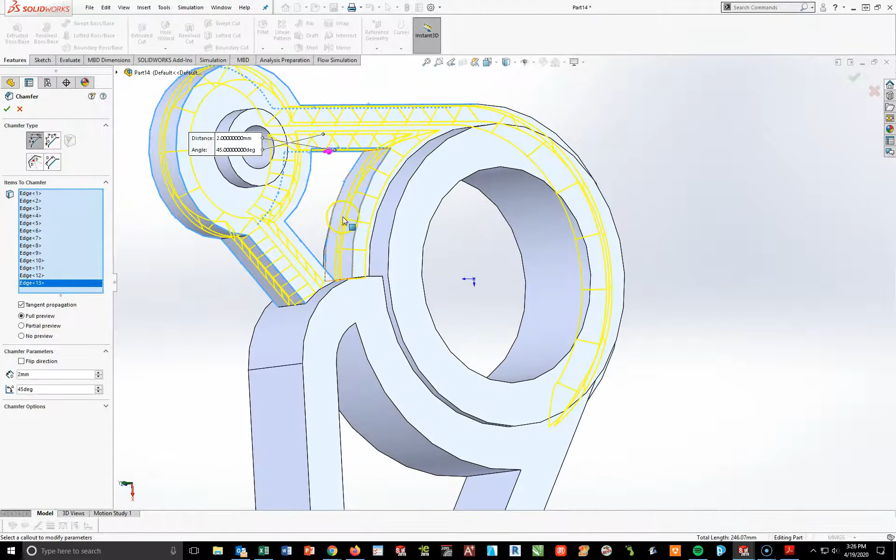And it may just be easy to hit the faces. I'm going to try that in just a second. But basically, this is all I'm going to do is hit these inside edges. I'm not sure what I've gotten done or what I don't. It doesn't look like I got this edge here. Okay, that looks pretty good.

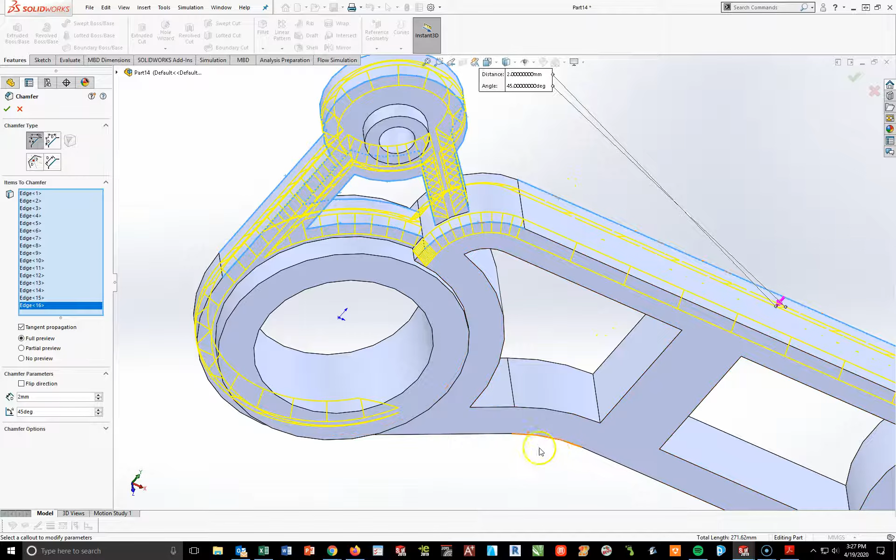I'm going to hit this outside edge here, that outside edge over there. I think that looks good there. I'm going to hit the bottom edge down here like so, this bottom edge down here. And then from there, it looks like it's all the inside edges.

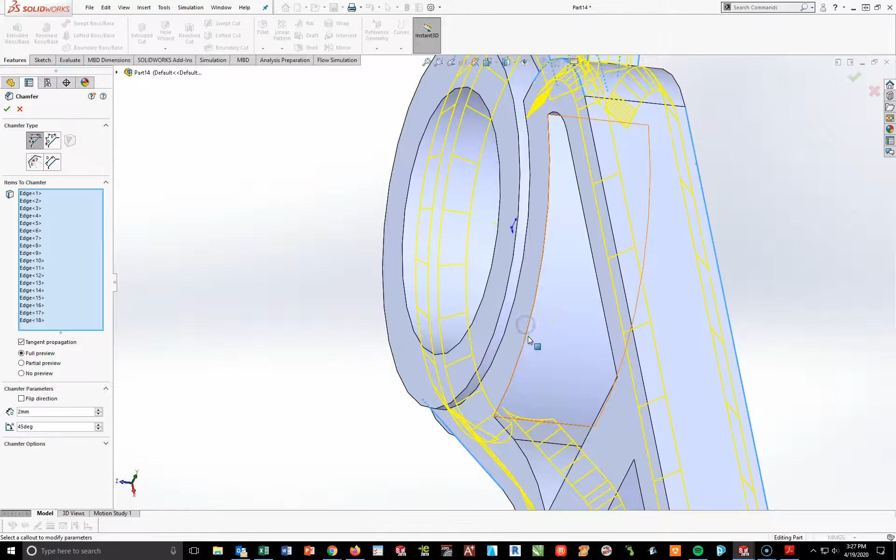Okay, now I'm going to try hitting this face. Nope, don't want to do that. That's not going to work. I'll hit this edge, not that face. I'm going to hit the edge. Hit this edge over here.

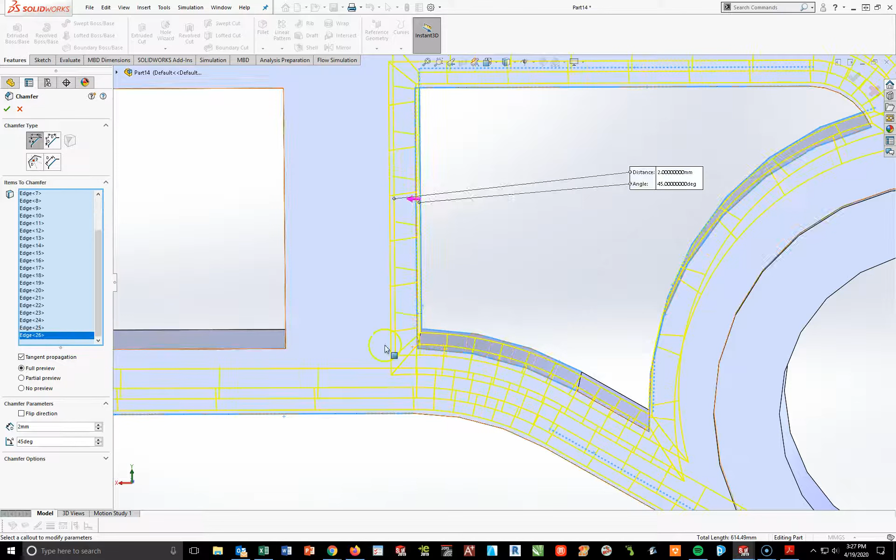And again, if this is confusing, you can do this in multiple stages. It's up to you. I'm trying to do it all in one shot. Kind of, oops, not the face. Hit this edge, hit that edge. This edge, that edge, this edge, here, here. And I'm going to color this in so you guys can see this.

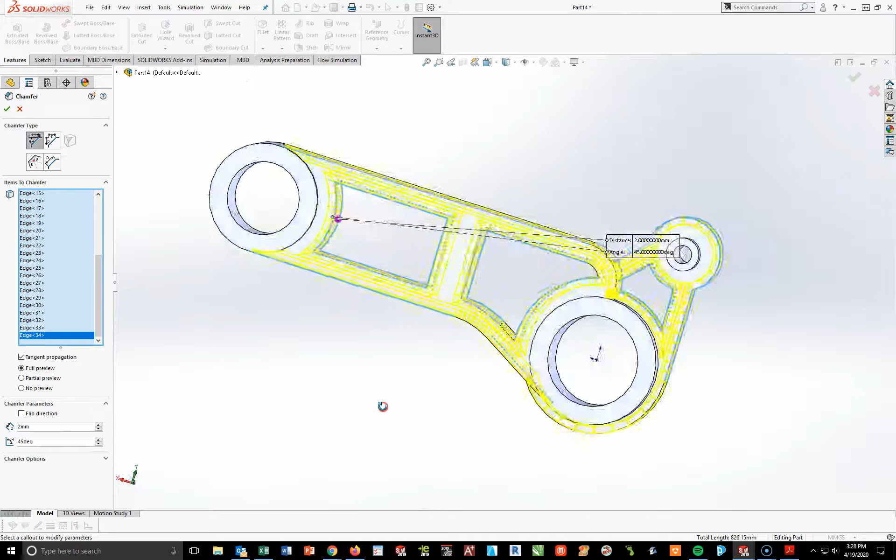This is one that's a little tricky. You're going to really want to watch this carefully on the film. Take your time. Essentially, you're hitting every edge, but this outside part of the circles. Okay? So if I do this, I'm going to hit my check mark. And this is kind of what I'm looking at.

Now what I'm going to do is add the red coloring, right-click, beach ball, chamfer. And I'm going to add that dark red coloring I normally do just to make it see if it looks just like the drawing I have up here, okay? And from what I can see, it does look like that drawing. This looks just like what it's supposed to, and that's what I want it to be, is this right here.

Okay, so looking at this, it looks correct. This is done. All those parts are chamfered. So now what I want you to do is save this.

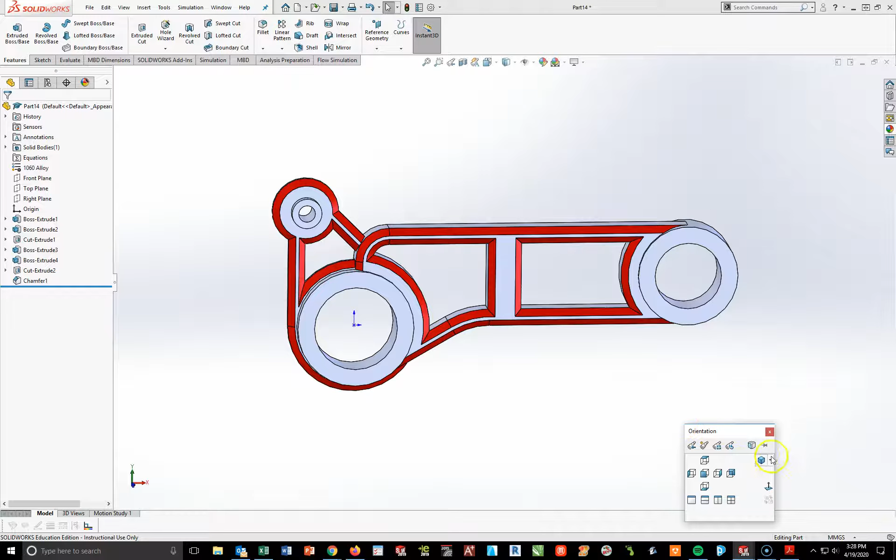I'm going to go ahead and do a file save as. So I'm going to do a control save. I want to save this into my folder. I'm going to call this control bracket. I'm going to go caps lock, control bracket, underscore part 1, underscore my last name, and save.

Okay, now at this point, I'm not going to go through this. I want you to show me what you got. I would go up to evaluate, get my mass properties. I want you to take that mass property and enter that answer onto the Schoology assessment for the first part. Okay, so this completes part 1.